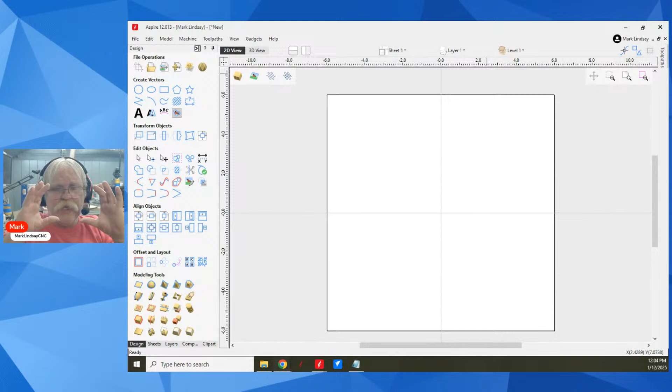Exploding a vector is pretty much getting in and taking that vector apart at its nodes. So in a simple illustration, I'm going to anchor a rectangle at X0, Y0, do square corners, and make it 3 by 3. And that puts a square right there.

Now I'm going to go into node editing. And the way I'll do that is just select that vector and tap the letter N on my keyboard. Now, you can also do that over here on this second icon under Edit Objects, but I find it easier just to tap the letter N.

Now, before I get any deeper into this, let me say to beginners and anybody who uses 2D vectors, if you're designing with 2D vectors, node editing is an essential skill. There are going to be times when you need to get in and work with a closed vector or an open vector. You might want to smooth out a curve, add a curve, or change a curve to a straight line. This is all done through node editing. Node editing is as essential as drawing.

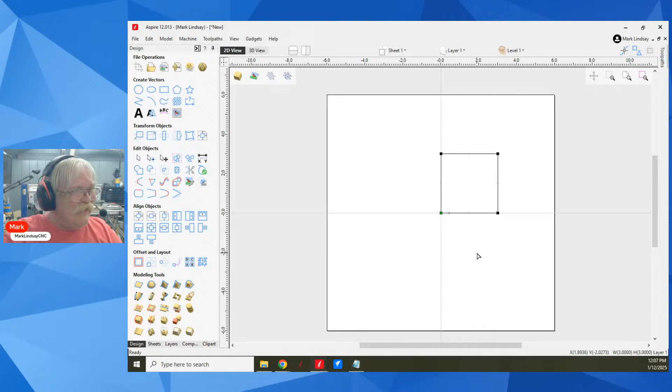When it comes to exploding vectors, basically what you're doing in this case, you're taking this rectangle and you're cutting it at all 4 of the nodes. So right now, let me come out of node editing by tapping the letter N again. So right now, this is a closed vector, but I can explode that into 4 separate straight lines. This is an option in Aspire and in VCarve Pro. This is not an option in VCarve Desktop.

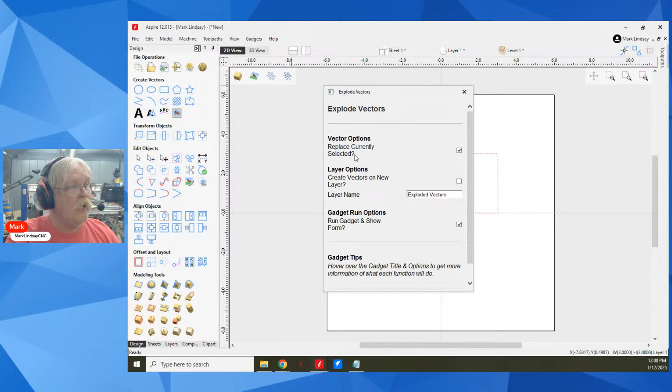And that's because we're going to use a gadget. Go up here to the Gadgets menu. With the vector selected, we'll go up to the Gadgets menu, come right down here to Explode Vectors. I'll click on that, and I have several options here. For my vector options, I can replace the vector that's currently selected, or I can not replace it, so I'll have 2 sets of vectors.

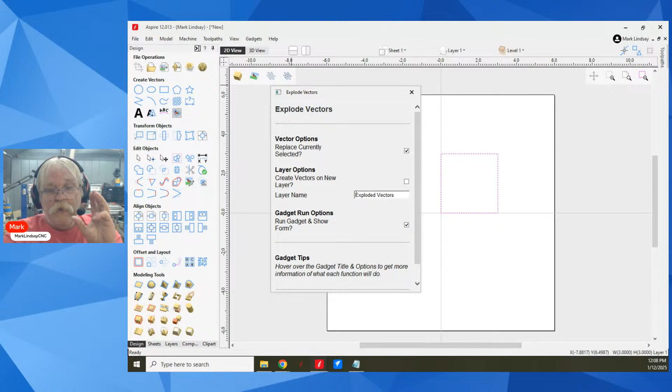I can put the new vectors on a new layer and name that layer right here. If you are going to keep this closed vector and not check that box, if you're not going to replace this current vector, put it on a new layer and name it whatever you would like. Otherwise, you are going to have a problem selecting a vector that's lying under this closed vector.

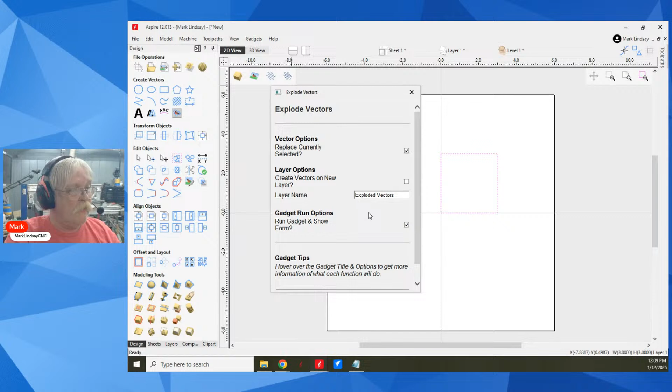All right, I'm not going to do that just for this demonstration. I'm going to go ahead and replace this vector with 4 separate vectors. Run the gadget and show the form. Yes, I'll leave that be. And I'll click OK. Now, it doesn't look like anything has happened, but now I can select each of these lines and they're separate vectors.

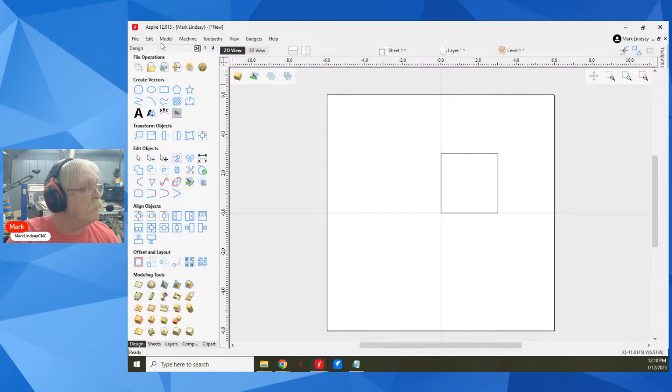Now you may be wondering why this would even come in handy. What would you want to do this for? Well, let me Control Z to undo that. And let's say, oops, I need to Control Z again. Nope, still won't be undone. I can't Control Z out of a gadget. Edit... yeah, I can't Control Z out of that. I didn't realize this - a gadget made a modification and I can't undo that. So there is a point to be made right there, and that's something that I didn't realize.

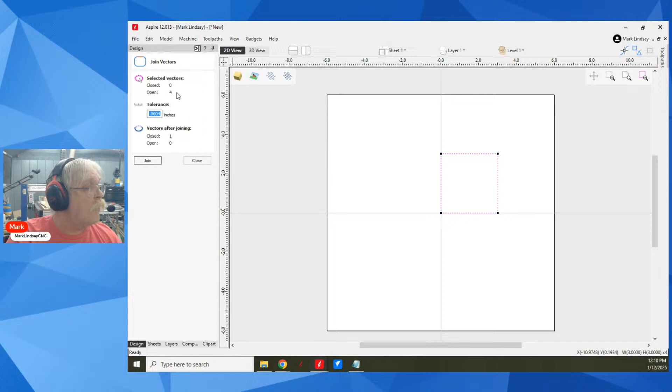I'm going to go back and just join them. 4 open vectors, I want 1 closed vector. Boom. Now you may be wondering when something like this would come in handy. Well, let's play around with it a little bit here.

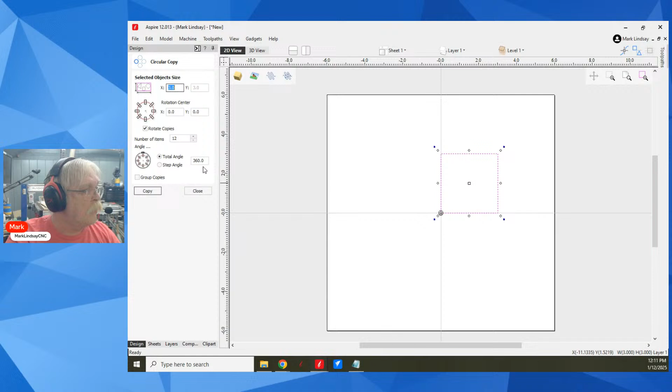I've got this selected. I'm going to do a circular array, and I'm going to put the rotation center at my 0,0 - x0, y0 - by double clicking that center point right there, and that puts my rotation center at x0, y0. And I want, yeah, we'll go with 12 copies on a total angle of 360 degrees. I do not want to group them. We'll click copy. So now I have 12 closed vectors, but I want to do some modification in here.

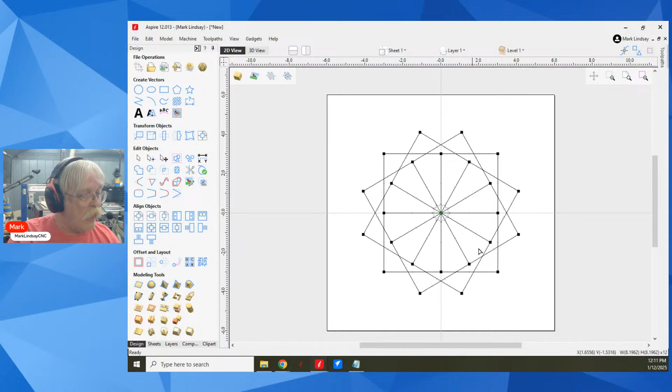So let me just see what I'm working with. I'll select all of them, tap N to go into node editing, and I've got a bunch of points, and the start points for each one of these is in the center. Okay, I can see that - that looks kind of cool. Tap N to come out of node editing, and now I'm going to explode these vectors. So I'll come up to Gadget, Explode Vectors.

I'm going to replace the ones that are currently selected and type OK. And now all of these are separate lines.

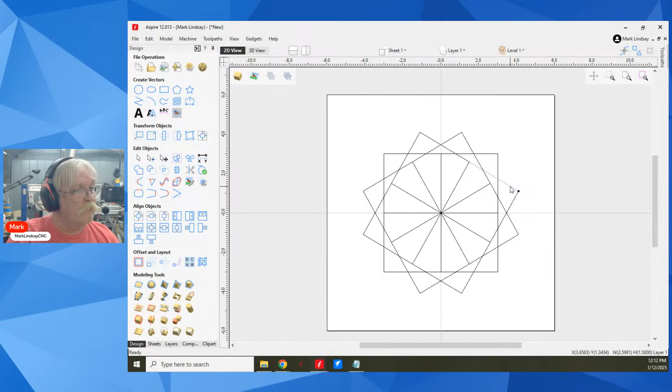Now I'm going to take my scissors and just come in here and clear out all of this stuff.

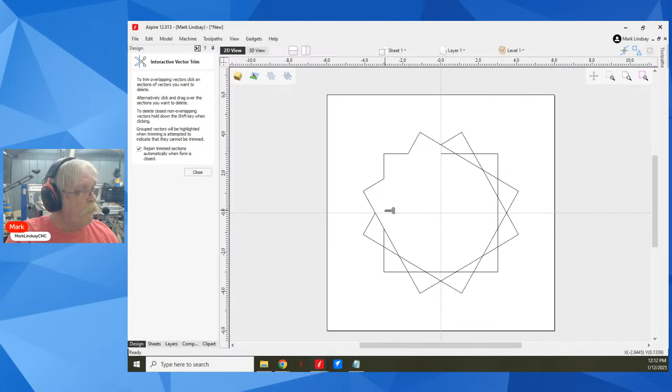And I think that's a cool pattern right there in and of itself, but I think I'm going to just go for the outline. Whoops, control Z, control Z. There we go. I want to take away those, take away those. I want to leave the outside lines.

And make sure that I'm not removing anything I don't want to remove. And boom. Now, because I have this checked, rejoin the trimmed sections automatically when the form is closed. Close that, and I have a closed vector.

That would be one use when you would go ahead and explode the vectors. Let me double check to make sure that's a closed vector. I'll go over here to join, and it is one closed vector.

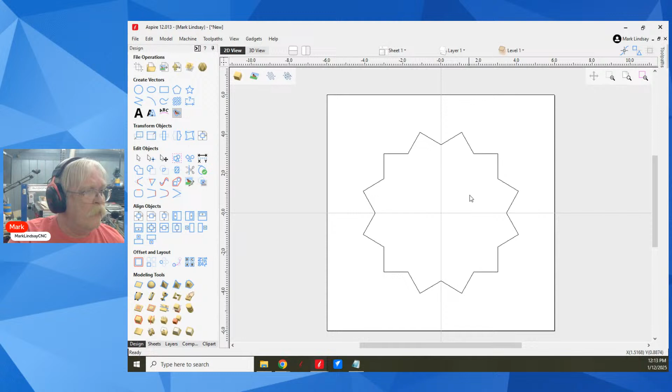There are a bunch of different ways, a bunch of different times that you would want to use something like this. But that's a very simple demonstration of a time when it would come in handy to explode vectors. So it's real easy: select the vector you want to explode, come up to Gadgets, Explode Vectors, make your selections.

Now, as Dwayne is saying here, one way to save gadget changes is to choose to save to a new layer, then turn off the old one. Absolutely, absolutely.

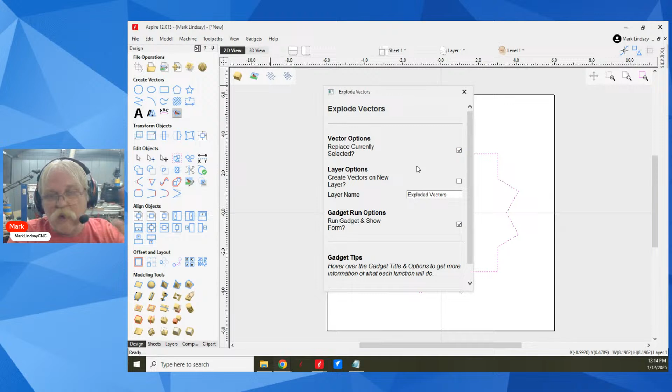I had totally forgotten that I couldn't control Z or edit undo a change made by a gadget. I had totally forgotten that was the case. So use your options here, figure out what you want to do, whether you want to replace the current selected vector or create the vectors on a new layer.

And go, and we're back again to the separate vectors. So, okay, let me go ahead and come back in here and see what you guys are talking about.

Yeah, exactly, don't avoid the node editing. You're showing your age, Brooks. You're showing your age. But yeah.

Okay, John Thumb is asking, how do I add align objects and modeling tools to my left side? Modeling tools, this is Aspire. If you have Aspire, you have these modeling tools here.

If you have VCarve, you'll have, I think it's, well, let's find out. I'll start a session of VCarve because I don't remember what all tools off the top of my head are. You have 6 modeling tools down here, and it's called 3D model tools because, again, VCarve is not modeling software.

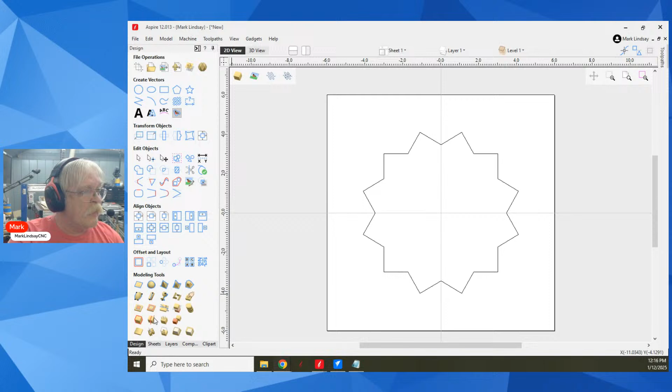You can't create a 3D model in VCarve. Okay. You can create a 3D model in Aspire. That's why I have all these modeling tools.

Now, as far as your alignment tools, you come up here to Transform Objects, to Alignment Tools, come all the way down at the bottom, Show Common Tools on the Drawing Tab. Put a check mark there and close it, and these Align Objects tools will be right here. Okay.

Now, it can get kind of crowded down here, especially in Aspire when you've got a bunch of stuff down here. But not many people know this, or not many people remember this. Up here, I've got Transform Objects. You can see that my cursor is a hand. That's because this is a link. These sections are collapsible; you click on them and they will collapse.

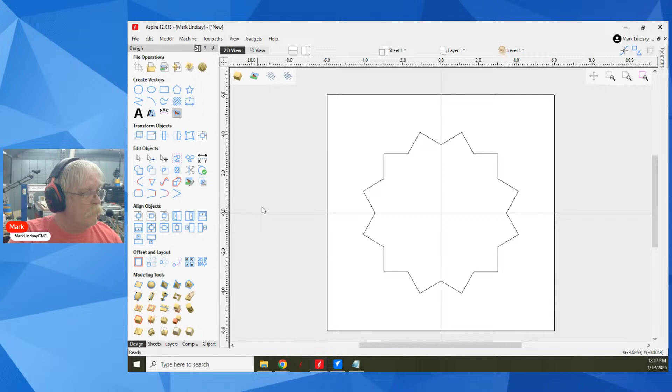So if it's too full over here and you're getting confused, you can collapse or open these options. That can kind of help when you're first starting out, but I tend to leave them open. Like I say, not many people know that it'll actually do that. So if you've been having issues, that's one way to collapse it all down.

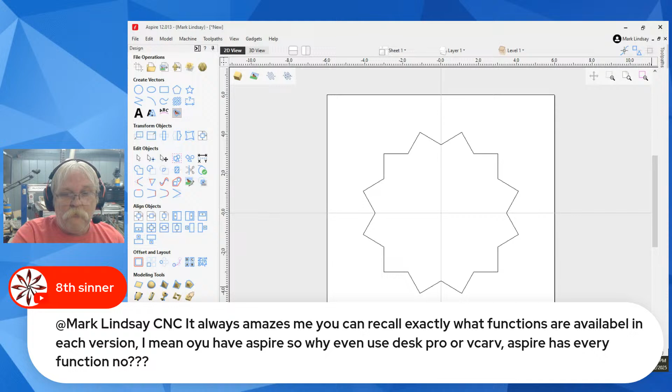So, let's see here, 8Sinners said, it always amazes me you can recall exactly what functions are available in each version. I mean, you have Aspire, so why even use Desktop Pro or VCarve? Aspire has every function, no? Yes, Aspire has every function that's in VCarve Pro.

But, and this dovetails into another question that I have here waiting in the queue, I'm a beta tester, and as a beta tester, they want to beta test both Aspire and VCarve. So having VCarve and Aspire available to me helps me to remember what's available in VCarve and what isn't.

Or excuse me, what's available in Aspire, what's available in VCarve, and the differences between them, because we test all of them. And everything that's in VCarve Desktop is in VCarve Pro, and everything that's in VCarve Pro, everything that's in Cut 2D is in VCarve Pro. So everything in Cut 2D Desktop is in VCarve Desktop.

So now let's see, it was Trent Hamilton asked me earlier, how did I become a beta tester? That is simply through the contacts that I have at Vectric.

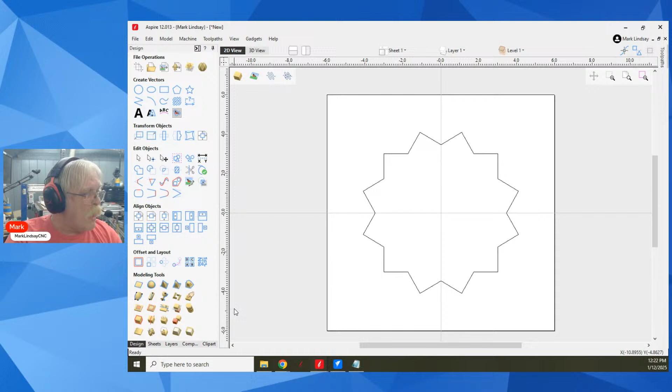Here's one that's real easy. Jim Brown is asking, can you raise and lower a zero plane? And the answer is yes, you can. Let me get over here. This is in Aspire, but it works the same way in VCarve.

There is Steve with a link to that Compass Rose live stream right there. Johnny on the spot, like I said, Steven on the spot. Thank you, Steve, I appreciate that.

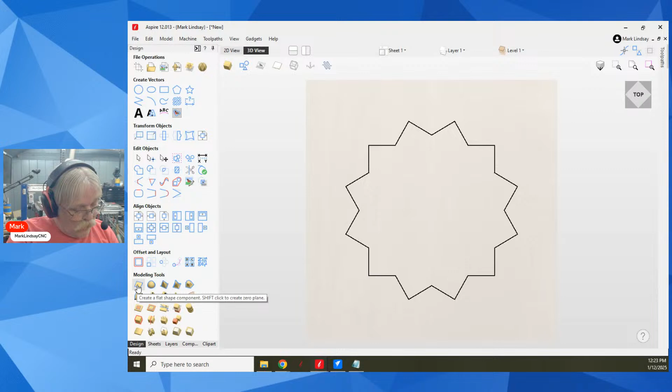Okay, let's get over here, and I'm going to go into the 3D view, and I've got no 3D content out here at all. But I'm going to come down here, and in VCarve, all you have to do is click on Create Zero Plane. In Aspire, you have to hold down Shift and click it, otherwise you're making a flat component. So we'll hold down Shift, and we'll click that, and that adds my zero plane.

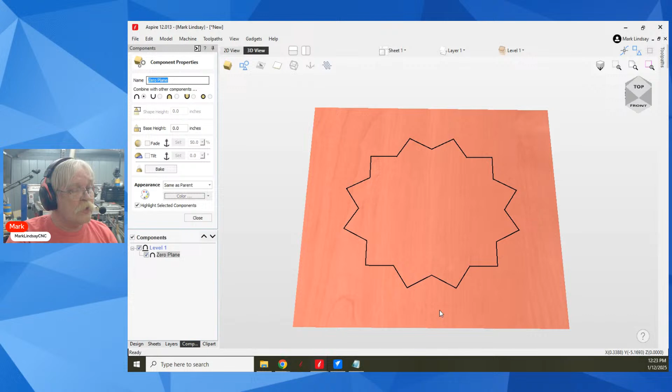Now I'll come over here into the Components tab. I'll click on that zero plane, right-click it, and go to Properties. The way I can adjust its level is by giving it a negative base height to drop down. A positive base height isn't really going to help you because it's the surface of your material. So I can come here and give it a base height of negative 0.25, and let it catch up.

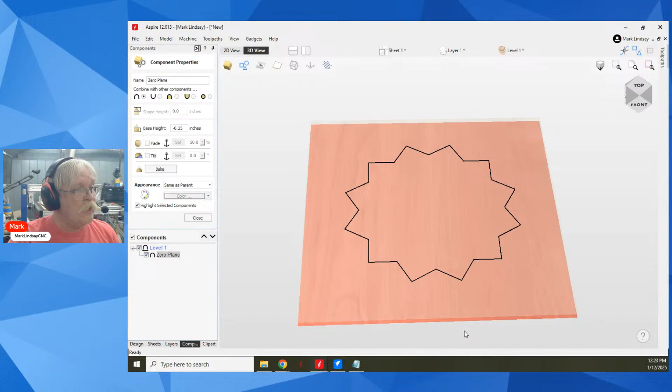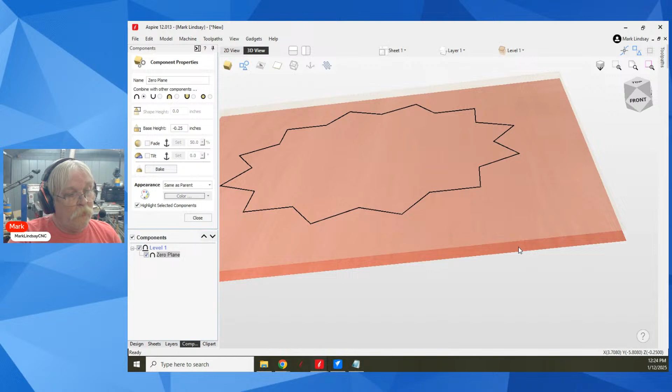Now we see that light gray, kind of a gray cast here. That is the modeling plane. That represents the surface that I'm building the model on. But if I look down here, I can see my zero plane. If you look at my readouts down here, I put my cursor over that surface, you can see it's a quarter inch below my surface. Okay, so that's how you can raise and lower a zero plane. Well, that's how you can lower a zero plane.

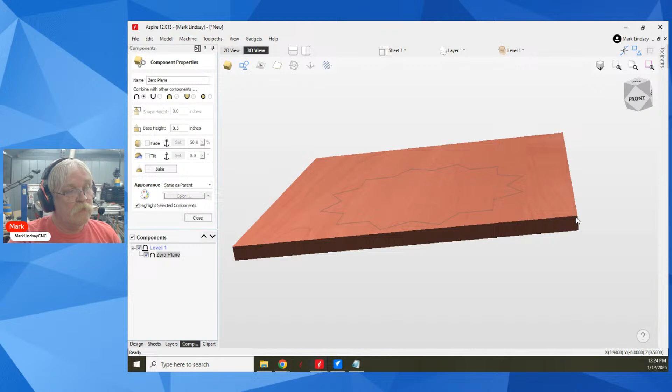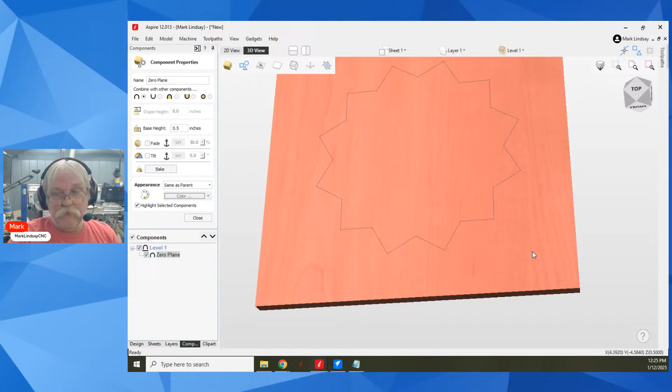Let's try a positive base height, 0.5, and let it catch up. And there we see my modeling plane is down here, and there is my zero plane. So yes, you can raise and lower it, you do it through the base height. You'll notice shape height is grayed out, and that's because the zero plane has no shape. It's a flat plane with a thickness of 0. Okay, so that's how you do that.

Close that, and I'll just delete it because I don't need it. Boom, gone. Come back over to the design tab.

All right, there we go.

John, do they pay you millions to be a beta tester? I wish, no there's no pay involved. What they do is give you the update you're beta testing. Right now we're beta testing 12.5, and we get the free upgrade to 12.5 - but that's everybody, everybody gets the free upgrade to 12.5. But for instance, from 11.5 to 12.0, I got the upgrade to 12.0 for free because I'm a beta tester. But no, there's no other pay involved. So it is a lot of fun, believe me.

Our mission is to break it. That's what it is, because they don't know what's going to happen if you hold down 3 buttons that aren't supposed to do anything, and then do an operation - is it going to crash the program? They don't know that, so they get as many people with different computers and different systems as they can. It's a pretty cool group, so I have fun with it.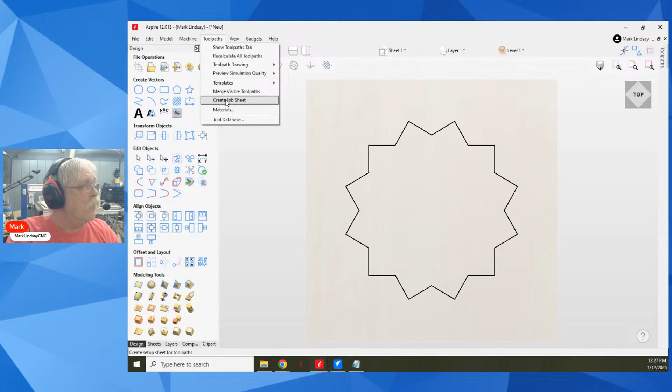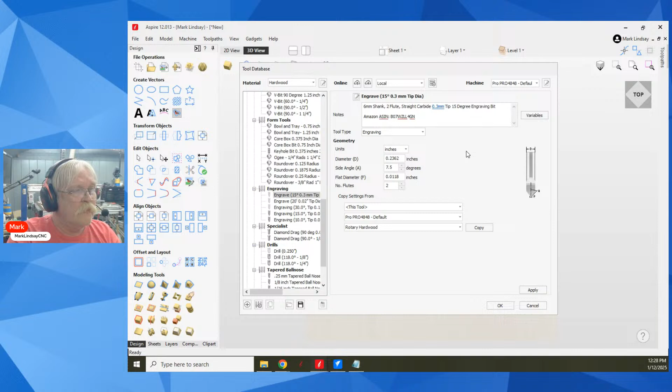Let me go ahead and bring it up here, go into my tool database, down here to engraving bits. I only have one V bit entered as an engraving bit, and that's because it was a little 6mm 15-degree V bit, but it had a flat tip - when I measured it out, 0.0118 is the flat tip on it. So I entered that as an engraving bit, but I've also got it entered as a V bit.

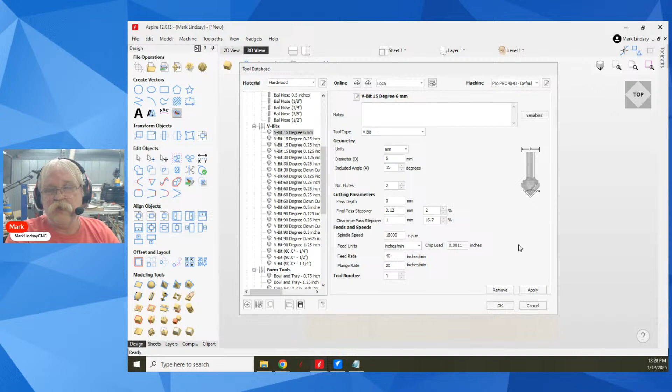So there are times when it does come in handy, but is it essential? No, not essential at all. If the bit's doing everything you want it to do, entered as a V bit, then that's all you need. I'm going to be doing some testing on something here pretty quick once I get my machine back up and running 100%. So that may change, but as it sits right now, there can be some benefits. But Dwayne, it's one of those cases where it's going to be project dependent. If entered as a V bit is doing fine, then it's not worth the hassle. But if it isn't, then maybe it's something to explore.

Okay, let's see here. I hope that answers that, Dwayne.

Let's see here. Alan Williamson asks, what is the correct height for mounting a router/spindle in relation to the Z mounting point to avoid any problems with it bottoming out? Okay, excuse me, I got the hiccups all of a sudden - stop it. Generally speaking, that is a question for the manufacturer.

However, I will say this - something I discovered when running my Gatton CNC, using my Porter Cable 890 router in that CNC router, I had to drop that router all the way into the mount. Otherwise, I noticed that when having it up out of the mount, suspended out of the mount, that opened up for flex when using a long bit. It could flex almost imperceptibly when making a long horizontal cut or something like that. So I had to drop it all the way down so it was holding that entire body.

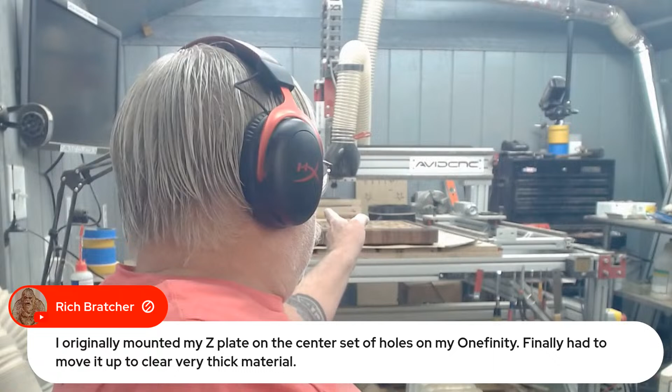Yes, there is that. And that's why a lot of these are adjustable, so that if you do a lot of thicker materials, you can bring it up. But the thing about it is, you've still got to make sure that bit and your material, you have to make sure your material is going to go under your Z-axis.

Mike Healy says, my machine lets you set a soft Z limit so you can't go through the spoil board. Yeah, there are a lot of people that do use soft limits for that. I generally speaking don't, because I'm not going to plunge my bit down that deep. If by accident I screw up, and I have, the deepest I have ever cut into my spoil board unintentionally was about 1/4 inch. So, yeah, a lot of people ask, why aren't there Z limit switches for the bottom?

You can set them up if you want, but if you ever drive that Z-axis down far enough to trigger that limit switch, you have other problems. You've already discovered there's an issue and have probably hit emergency stop, because it's really got to plunge way down and try to tunnel through your floor before it's going to trigger a limit switch, depending upon where you place the switch. But overall, in general, they're not needed. That's why most machines don't come with a bottom limit switch for the Z-axis. It's just not needed.

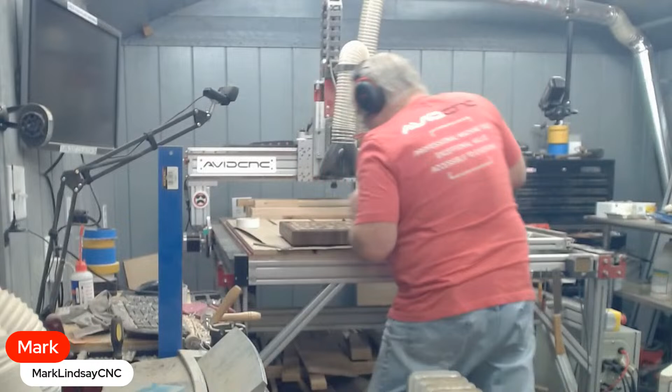David is asking, how is your clearance on your fourth axis? How does it affect your material size and other parameters? Obviously it did affect the width of the material I can put on there, but I don't do half sheets or full sheets of plywood. From edge to edge on the spoil board itself, not counting the T-track, I've got 33.5 inches, and if I overhang it to account for the T-track, I've got 35 inches in width and 49 inches in length. But the beautiful thing about the Avid is I can take that rotary axis off and set it aside, and I've done that.

So I still have 49 by 49. So yeah, it did affect the material size that I can cut, but not too much because generally speaking, I don't use that.

On the rotary, it has the same width and material capacity as if I'd put it crossways parallel to the X and dropped it down into the machine. The main reason for running it over there was to get it out of the way so I didn't have the chuck and tailstock sticking up out of the front of the spoil board. I just prefer to stick it over there, and the chuck and motor sit back far enough to be in some of the unused space behind the gantry.

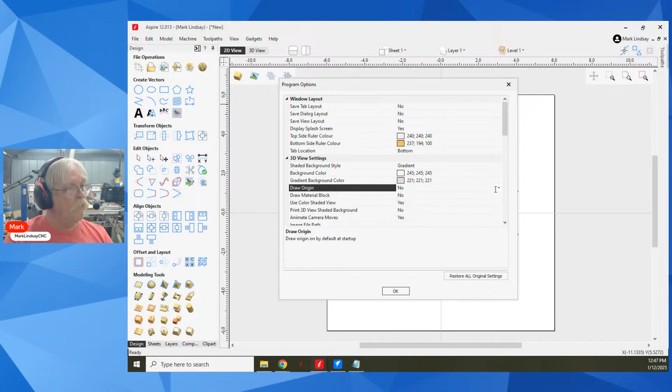Let's jump over here into the 2D view first. The origin point is going to be your X, Y, 0. Now you can come up here to edit, then options, and let's see here, 3D view setting - there it is, it's in the 3D view setting, draw origin. Come over here where it says no, click this arrow and click yes. Now you're not going to see anything in the 2D view, but if we come over to the 3D view, there is my origin - green for Y, red for X, and if I tilt it to the side, blue for Z.

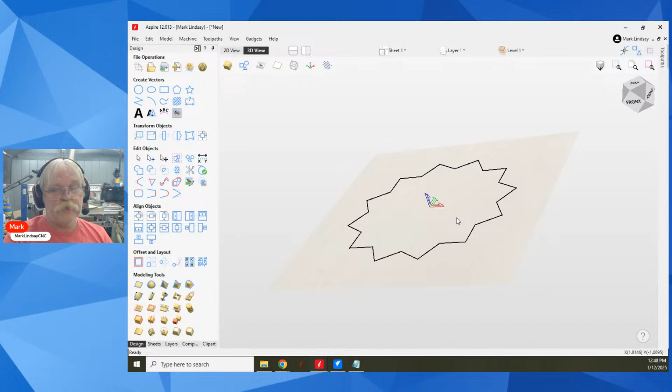Now it's going to be placed wherever you set your XY 0 right here, your XY datum position. So I have mine set to the center, so my origin is going to be right there in the center. Now if that ends up being in the way or too much of a distraction, you can come back up here to edit, options, 3D view settings, draw origin, click the arrow, change it to no, click OK, and it's gone.

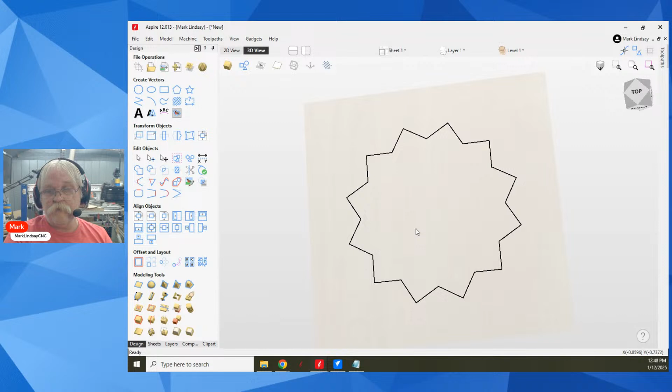Yes, AL, perfect - RGB equals XYZ. Absolutely, the X in red, the Y in green, Z in blue. And if you go into something like SketchUp, you'll see the same thing - X is red, Y is green, Z is blue.

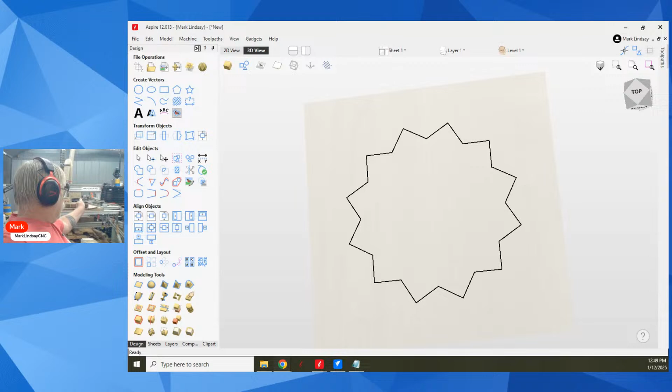Let's see, John's asking, so the rotary is like a lathe? Kind of. There are ways of setting it to spin like a lathe for sanding or something like that, but that's not how it's used. Generally speaking, you're cutting 2D or 3D shapes and the axis will rock back and forth as the bit is carving in Z.

Now again, there are workarounds. You can set it up, you can command it to sit there and spin like a lathe at a certain RPM, but that requires a little bit of playing around with post processors and files and things of that nature. So let's go to another one here. Hope that answers that, John.

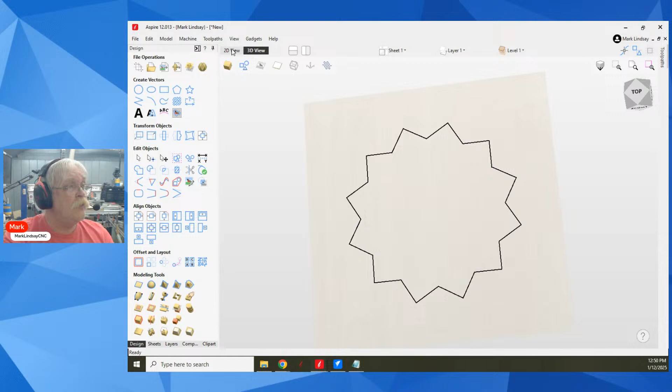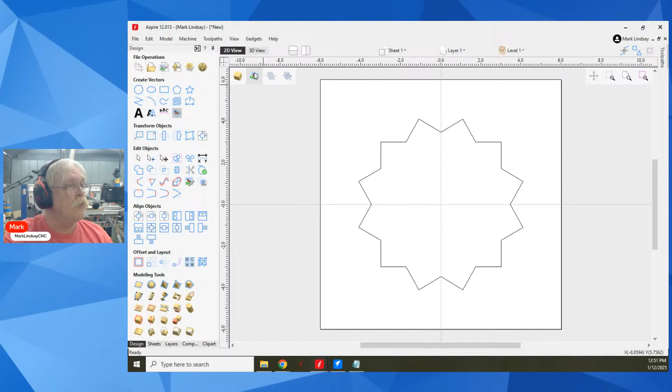And in the 2D view, you're looking down straight at the 2D view as if you were looking at the top of your machine. This direction is always going to be Y, this direction is always going to be X. And when you're drawing in the 2D view, there is no Z because, again, it's 2D, X and Y. It's only when you get into the 3D view that you have Z to concern yourself with.

All right, let's see here. The Fuzz says, how come I have to use a pocket allowance when running a finishing pass using a lower step over with a bowl bit? I don't know that you do need to use a pocket allowance, using a lower step over with a bowl bit. Generally speaking, I've never had to do that.

Okay, I see what you're getting at - it might be to make sure the bit doesn't overshoot, you know what I mean? I've never had to, but that doesn't mean I won't have to. It cuts wider if I don't use a pocket allowance - yeah, that's what I mean, to keep it from overshooting that vector boundary. That may be the reason why you have to use that pocket allowance. That might be a question for Vectric - I would shoot their Vectric support an email and ask them. I will ask them myself, but that's a good question.

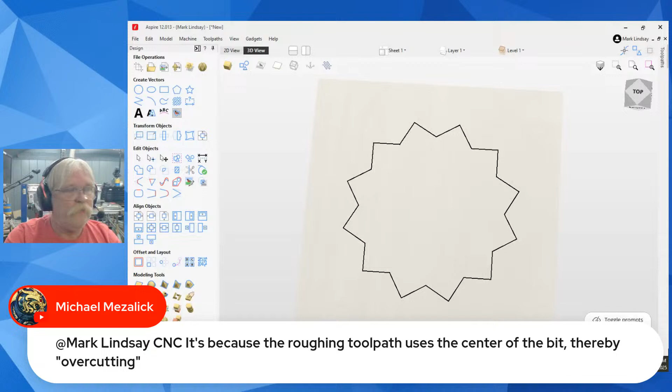Michael Mezalick says it's because the roughing toolpath uses the center of the bit, thereby overcutting. Gotcha, okay, that makes sense. So basically, when you create a pocket - thank you, Michael - that makes... oh, I didn't do that. Let me go back over here and join all these up. I forgot I did that. Let's join - all right, we got one closed vector now.

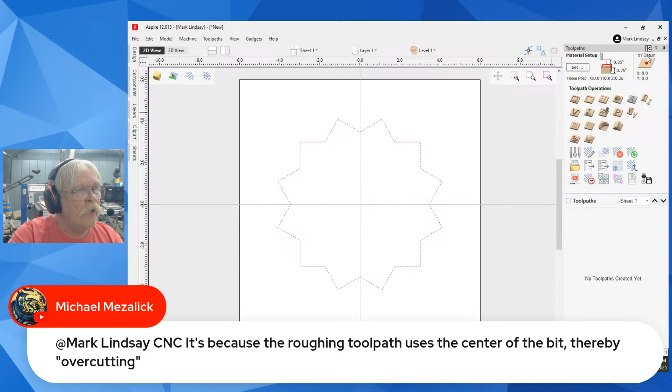Okay, we're going to use - I don't have that tiny of a bowl bit, no, we're not going to use that. I'm going to add a new layer. Boom, and call it layer 2. I'll make that active, turn off layer 1.

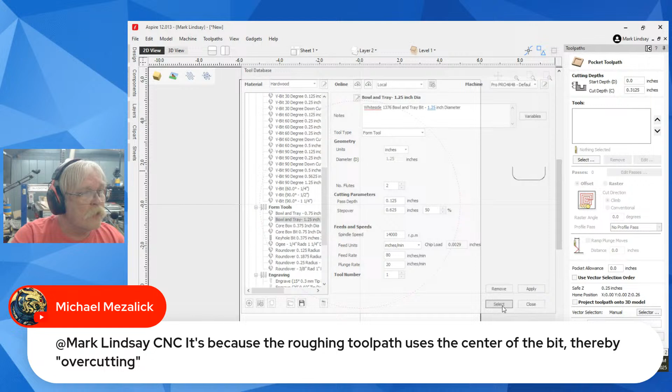Let's make a bowl with a 10-inch diameter on my X and Y 0, and we'll close that, zip over here, and I'll pocket that out. That's fine, that's enough of a dish. Remove that core box bit, and I'm going to select my 1 1/4 bowl and tray bit. Select. And I'm going to use my 1/2 inch end mill to hog it out. Boom. All right, so that's going to be my roughing toolpath, and that's going to be my finish toolpath.

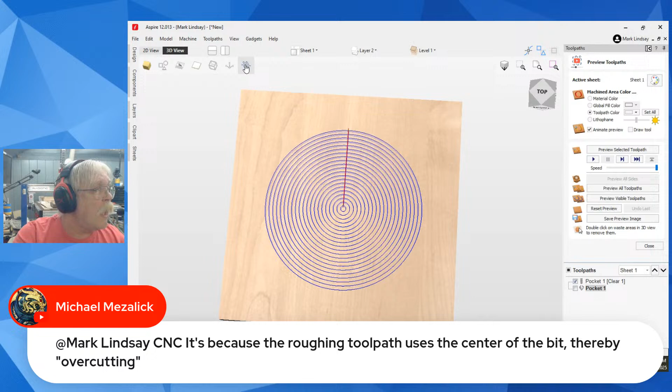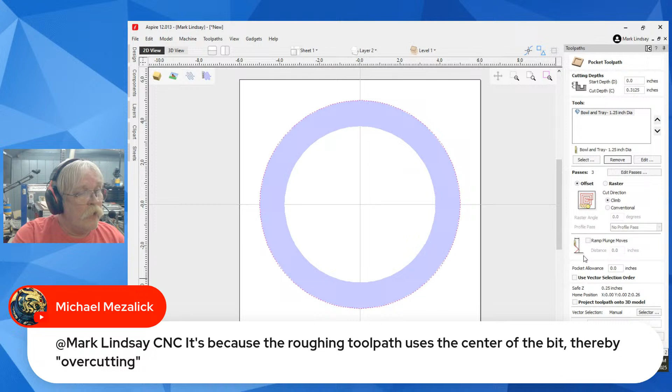I'm going to use a pocket allowance of 0, and we'll calculate. Now I'm going to shut off each one of these. I'm going to go ahead and select my pocket clearance. Over here in my 2D view, I've got toggle the toolpath 2D drawing style. Select that, put a check mark - that's what my bit's going to hog out. Select this one - that's what that bowl bit's going to hog out. Now if I'm not going to use this clearance bit, let's remove that. I'm just going to use that bowl and tray bit and use offset, calculate. Again, go back over to the 2D view, and I'm using the solid view. Yeah, that still didn't go outside of that - it still didn't go outside of those vectors.

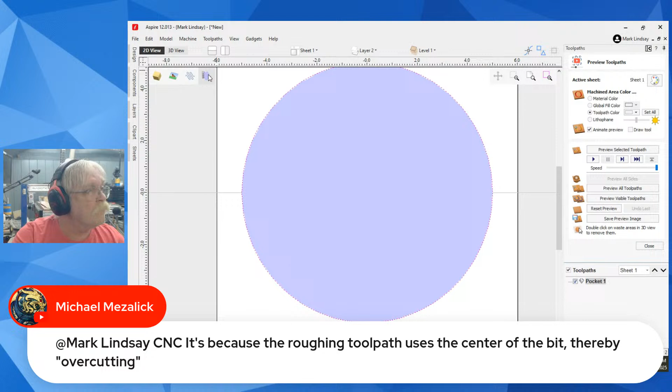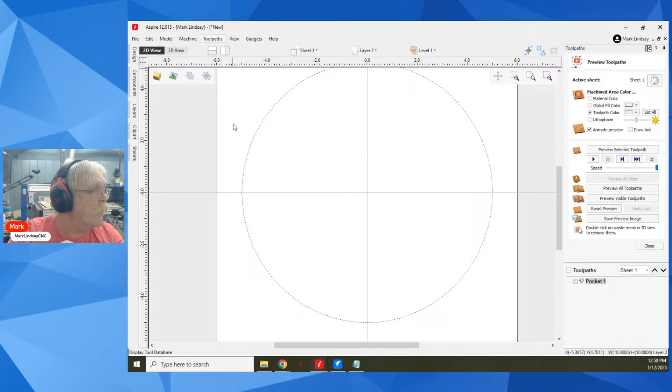So basically I'm not sure what it's doing, I've never had that happen, but I will get an answer. And Michael, thank you, that does make sense - when it's roughing, it measures by the center of that bit. Tool database - let's go back in and take a look at that bowl and tray bit. It's going by the center of the bit, not the outside edge of the bit. That makes sense.

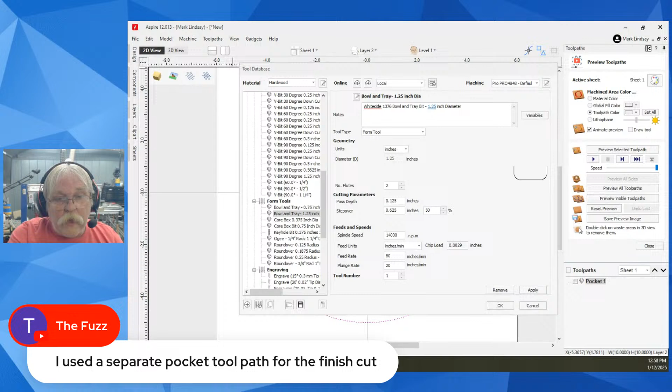Use a separate pocket toolpath for the finish cut - there's your answer, there's your answer, there's your answer. Close that, boom.

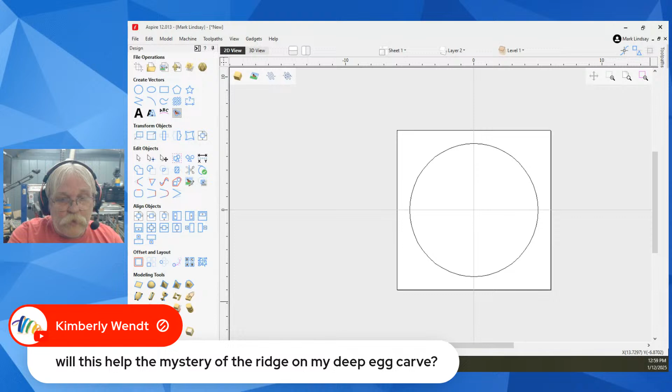Will this help with the mystery ridge on my deep egg carve? Probably not, probably not. That's why I'm going to get an answer from Vectric to find out.

Alan Williamson is asking, is your chopping board project completed? That's an ongoing thing.

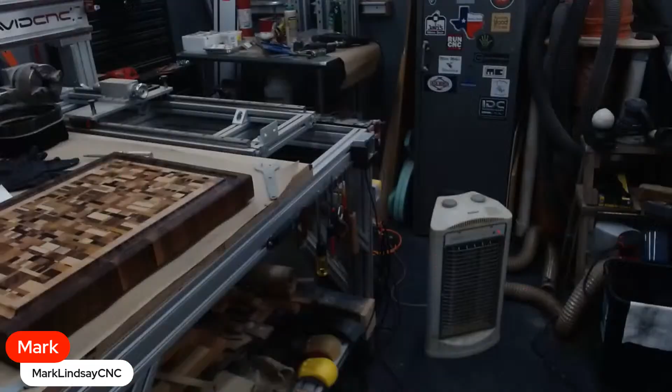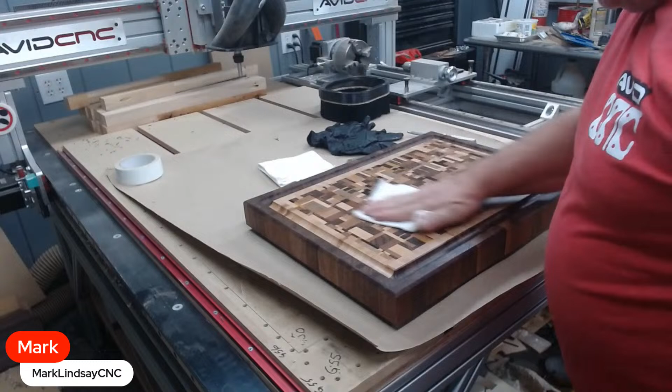Let me change cameras. Shaboom, that should point at it - well, it will in a minute. This right here is 5 coats of 100% pure tung oil, and you can see it's still kind of leaching out a little bit. I think I'm done applying the tung oil, but I'm not certain.

I may go 6 coats. The short answer to the long question is it's not quite done. It'll need to go in the house and sit, acclimate, and leach out more. If it has more to leach out - but as it sits right now, no, it's not done. But I'm not going to be cooking any briskets until this spring or summer anyway, so I don't need it just yet.

What does that mean? Okay, the 100% tung oil is an oil from tung nuts - sounds so wrong. TUNG, it's an Asian tree, and the oil will solidify and form a film, but it takes a long time. It's an oil - oils evaporate very, very slowly. So you apply it and it remains liquid until that solidification happens, and that could be anywhere from a week to a couple of months.

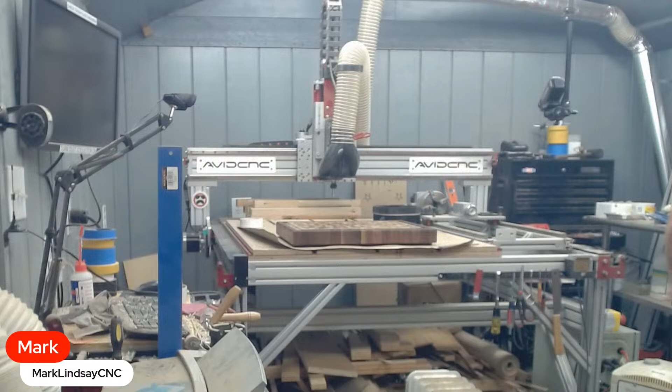100% pure tung oil is food safe. It is food grade. This is the brand I use: Hope's 100% pure tung oil. Tung oil finishes - don't use them if it's not food grade. Some of them have other varnishes, thinners, and other chemicals. They are not food safe.

And this is the solvent I used, citrus solvent. That's what I used to thin it. I thinned the first coat, and then I did not thin after that. And as it sits right now, that you just saw was 5 coats. The final finish will be Howard's Butcher Block conditioner - that'll be the final finish, and I think that'll go on probably this summer. I have used mineral oil and beeswax in the past, and I'm just not a fan.

Let's see here. Gary Meyer says, I have always used heat treated walnut oil for my food grade work. And that's a valid alternative. My only issue, and I have nothing to base this on Gary, my only issue is I don't know if that would trigger a nut allergy, and I have to be careful with my grandkids and what have you. So I just went for something that I know there are no problems with.

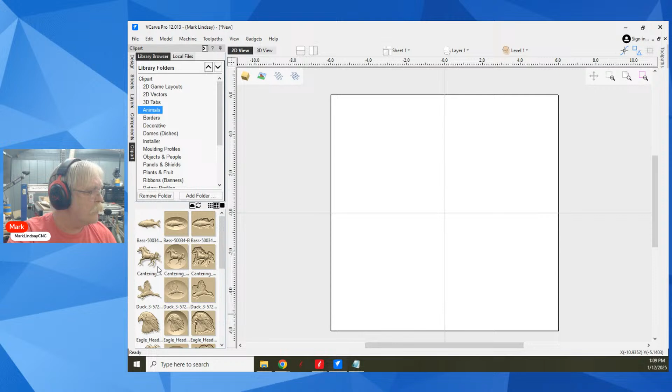Looking at VCarve Pro here, all right. I can go into my clip art and get into animals, and we'll put a stallion out there in the middle of it. Okay, go back into my design tab here. Let's enlarge it here, look at it in my 3D view. Looks pretty decent, I like that.

Okay, we're gonna go to, okay, show you how to do this from the start. Click it once, we've selected the model. Right down here, we have three different options: we have an overall shape height, a shape height, and a base height. Shape height is the height of the model itself from the modeling plane.

The base height right now is 0, meaning I don't have a base underneath where this model starts. I can add one, but I don't want one. This is the overall shape height; shape height plus base height is the overall model height, the thickness of it. We're looking at 0.7398. That's okay, it'll fit in my 3/4 inch material.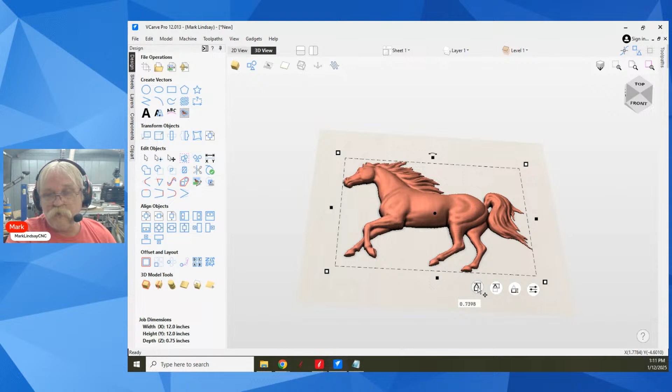Go back to a straight top view. I can carve this model in VCarve Pro. I can't, however, create my own model. This is a 3D component.

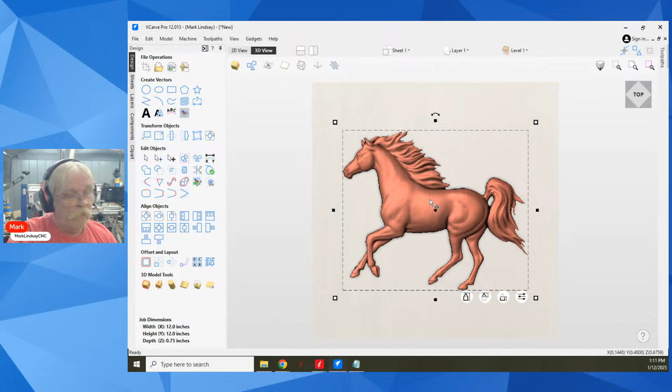We go over here into the Components tab. I can add more components. I could put this down in a dish, put it on top of a dome, add other things on top of this model, put things in the background, like trees and so on. I can bring more components in, but I can't create my own components. I can't bring in the vectors of a horse and create these shapes in VCarve Pro or VCarve Desktop.

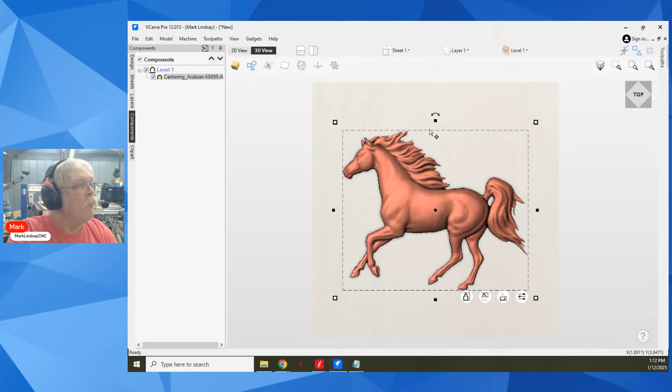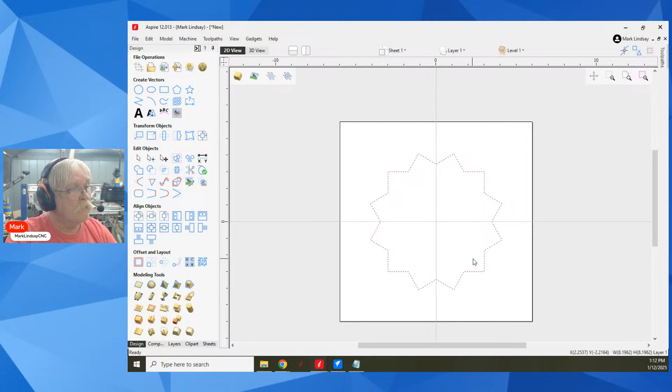Back over to the Design tab real quick. In Aspire, I can create those shapes. We'll go in, turn on layer 1, make it active, shut off layer 2, and select that shape, come down here into my modeling tools, and let's create a rounded shape using this vector.

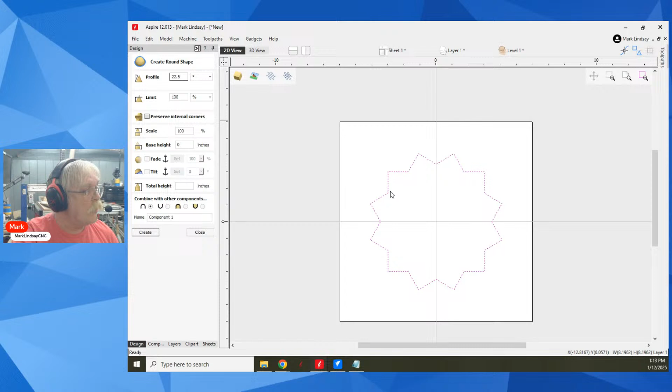I'm gonna set a profile of, let's make it 22.5 degrees. I'm going to preserve the internal corners so they're not rounded. Let me look at my 3D view, and I've just created that model. This cannot be done in VCarve.

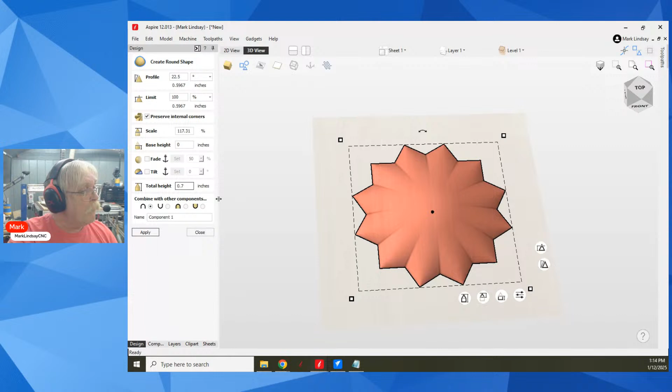I'm not going to fade it or tilt it, but I'm going to bring my height up to 0.7, make it 0.7 inches thick. And we've got the right, I want it to add. All right, apply, and we'll close that. So I've made that 3D component. I can't do this in VCarve. That's the difference. I hope that answers that.

I have used a number of things over epoxy. Generally speaking, the dirty little secret that most people don't know, or don't pay attention to, is that about 99.999% of the epoxies we're using in these projects are urethane based. So you can put a polyurethane finish over epoxy. Lacquer doesn't work out so good—it can, but beside the point.